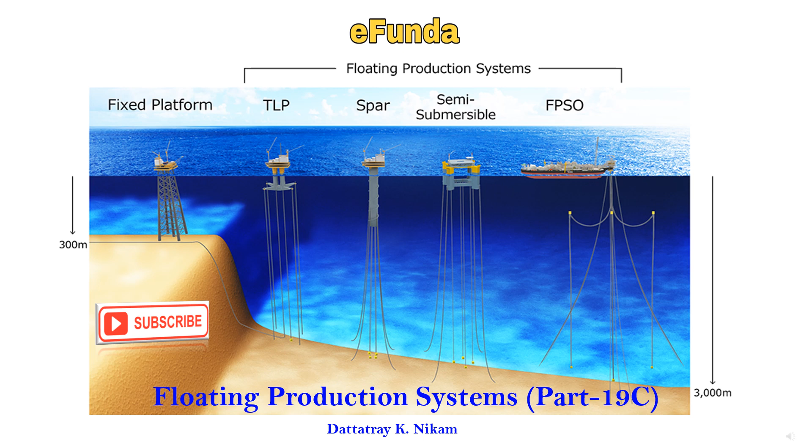So let's begin with our today's topic, that is Floating Production Systems Part-19C. Floating Production Systems. For these topics we have collected some of the pictures from the internet and some of the company websites. Thanks to those organizations for having such great pictures where one can describe the details of the various floating production systems.

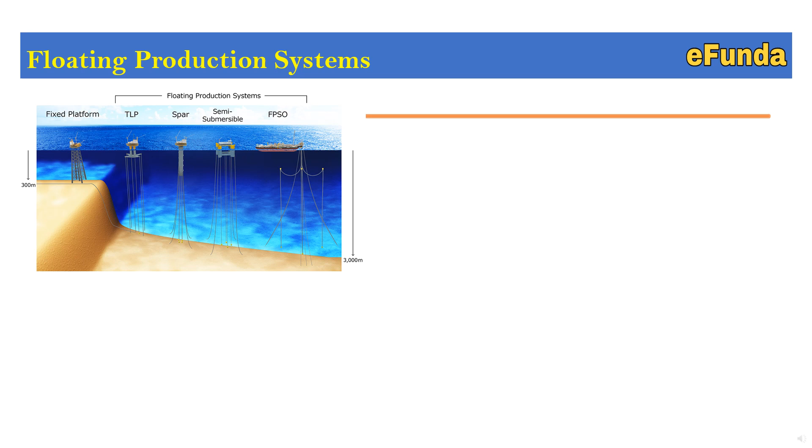One can refer to the picture where the floating production systems are shown, where the types are covered: fixed platform, TLP, SPAR, semi-submersible, FPSO. Production systems used for offshore oil and gas production are classified as fixed platform and floating platform based on the type of the platform.

A fixed platform is a platform that is fixed on the seabed. On a fixed type platform, including the production system itself, it is necessary to construct infrastructure such as submarine pipeline, onshore storage tank and port loading facilities.

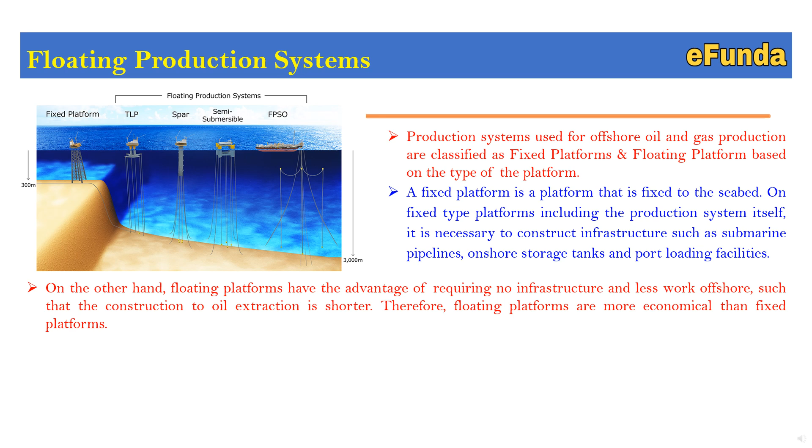On the other hand, floating platforms have advantages of requiring no infrastructure and less work offshore, such that the time from construction to oil extraction is shorter. Therefore, floating platforms are more economical than fixed platforms, as the structure and offshore work is minimum.

By applying advanced mooring technology, floating platforms can operate in water too deep for fixed platforms to be installed. In recent years, the development of offshore oil and gas fields has expanded to deep water and ultra deep water areas, and the number of operating floating offshore oil and gas production systems and the demand for such systems has grown, which led to the development of various FPSOs, FSOs, TLPs and production semi-submersibles, etc.

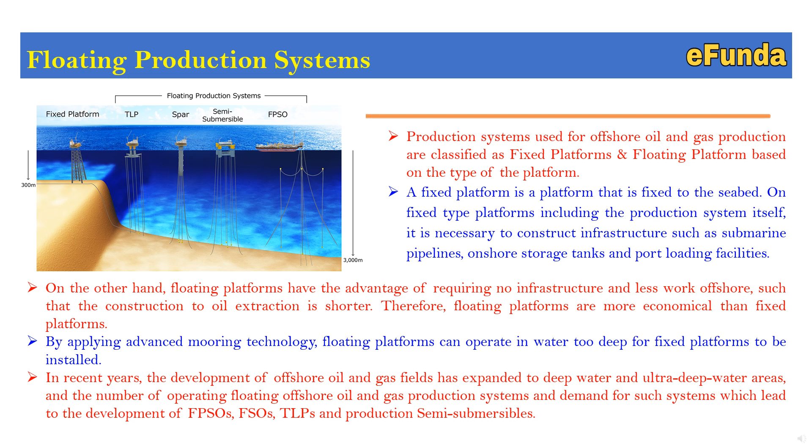This is how we have tried to cover the types of the floating platforms and systems, and the details we will see in the next slide. As we progress in this video, it will be very interesting, as we are trying to cover the floating production system, their details and types, along with typical block diagrams, sketches and platform details. So keep watching this video till the end.

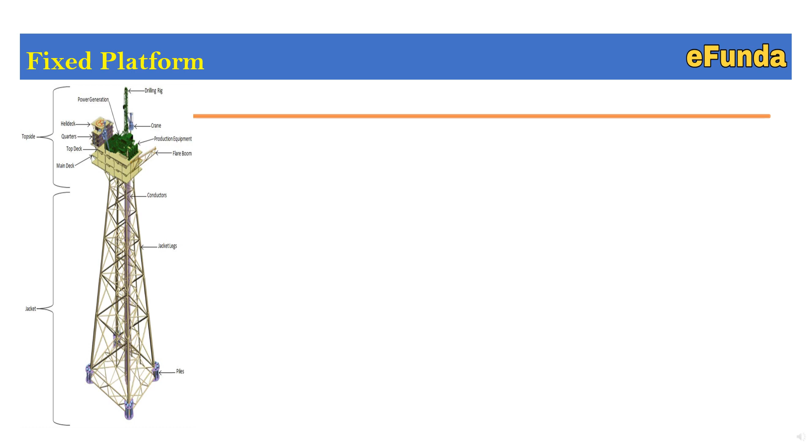Fixed type platform. One can refer to the pictures where one typical structure is shown, with the details of the various components being installed. Similarly, one can refer to the other picture where various types of typical towers are shown. Similarly, the third picture where you can see the details of a few more towers, which we will see in detail.

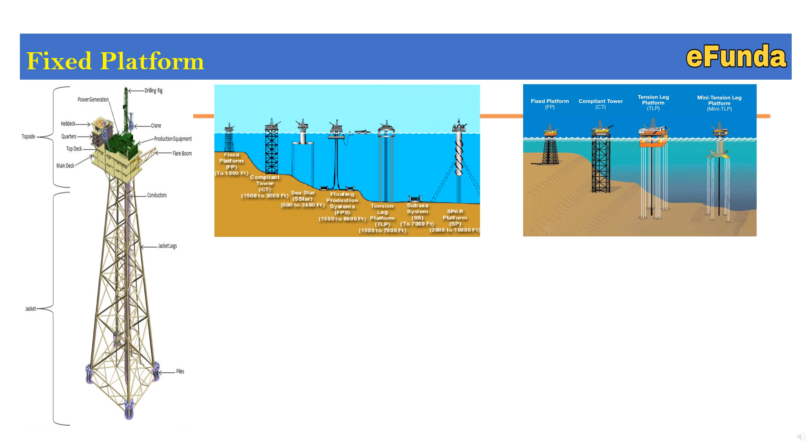A fixed platform is a type of offshore platform used for the extraction of petroleum or gas. These platforms are built on concrete and/or steel legs anchored directly onto the seabed, supporting a deck with space for drilling rigs, production facilities and crew quarters.

One can refer to the picture on the left hand side. One can see the jackets where the piling is done. Jacket legs are shown. Inside, the conductors are there. On top of that, one typical topside is installed. The various components of the topsides are the flare boom, main deck, top deck, living quarter, helideck, production or power generation, drilling rig, crane, production equipment, etc.

Conventional fixed platforms used for the production of oil and natural gas are constructed on top of steel jackets that are anchored with steel piles secured into the seabed. These platforms are strong and hold up well against environmental forces, but they are too costly for depths of over 1,500 feet.

One can refer to the second picture where each structural type along with the water depth is shown. Fixed platform FP to 1500 feet, compliant tower CT 1500 to 3000 feet, Sea Star 500 to 3500 feet, floating production system FPS 1500 to 6000 feet, tension leg platform TLP 1500 to 7000 feet, subsea system SS to 7000 feet, SPAR platform SP 2000 to 10,000 feet. This is how the types are covered.

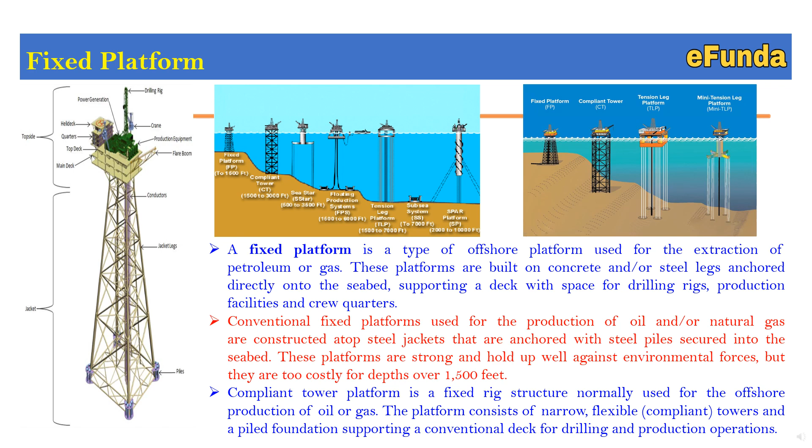A compliant tower platform is a fixed rig structure normally used for the offshore production of oil or gas. The platform consists of a narrow, flexible compliant tower and pile foundation supporting a conventional deck for drilling and production operations. One can refer to the third picture where the details of the fixed platform, compliant tower, tension leg platform and mini tension leg platforms are shown. This is how the fixed structures are installed at the seabed level, supporting the structure.

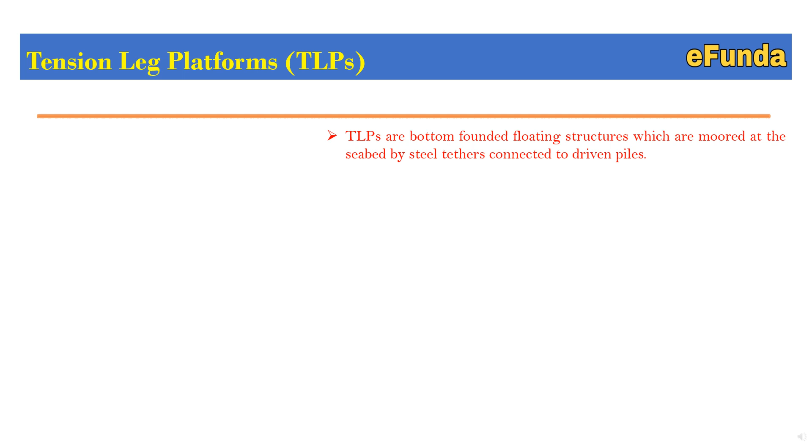Tension leg platform, that is TLPs. TLPs are a bottom founded floating structure which are moored at the seabed by steel tethers connected to driven piles. A tension leg platform is a vertically moored floating structure.

One can refer to the picture where one can see the connection to the seabed along with the hull and the topside, where mainly the starting of the oil export line, gas export line, production facilities, accommodation, helipad, drilling rig, topside facility, hull and tendons are connected.

The platform is permanently moored by means of the tethers or tendons grouped at each of the structural corners. A group of tethers is called a tension leg. A feature of this design of the tethers is that they have relatively high axial stiffness, that is low elasticity, such that virtually all vertical motion of the platform is eliminated,

and this allows the platform to have the production wellhead on the deck connected directly to the subsea well by a rigid riser instead of on the seafloor. This allows a simpler well completion and gives better control over the production from an oil or gas reservoir and easier access for downhole intervention operations. This is how the tension leg platforms are built.

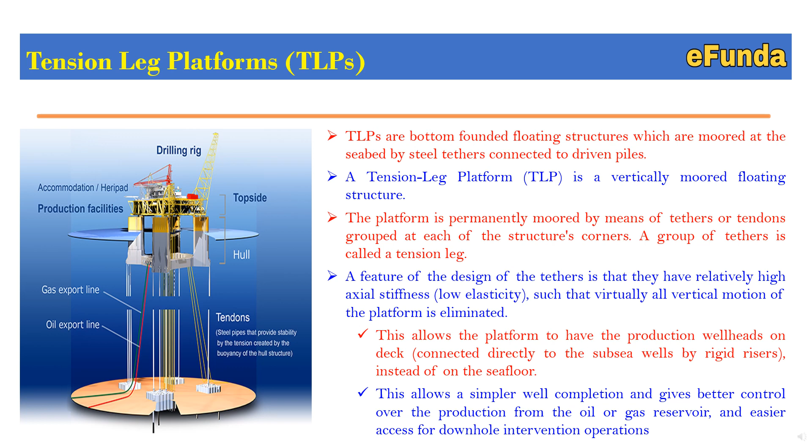Moving on to single point for activities and recreation, SPAR. A SPAR is a type of floating oil platform typically used in very deep water and is named for logs used as buoys in shipping that are moored in place vertically. SPAR production platforms have been developed as an alternative to conventional platforms.

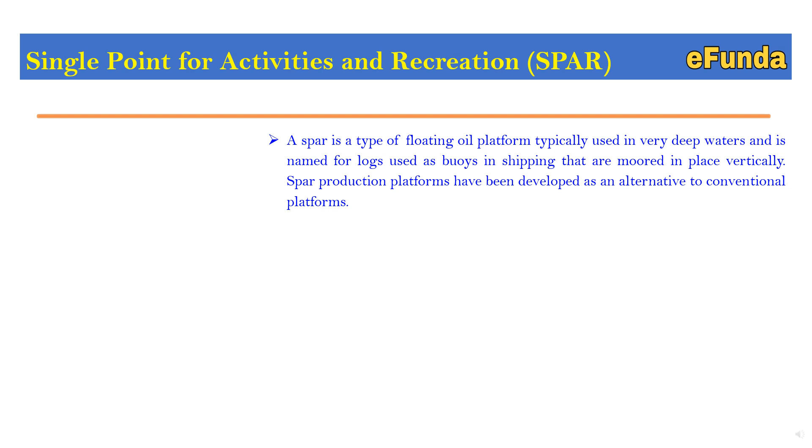One can refer to the picture where the components involved are truss spar, freeboard, hard tank, midsection, soft tank and keel. Spars are moored to the seabed, but whereas a TLP has vertical tension tethers, a spar has more conventional mooring lines.

Spars have to date had three configurations: the conventional one piece cylindrical hull, the truss spar where the midsection is composed of truss elements connected to the upper buoyant hull with the bottom soft tank, and the cell spar, which is built from multiple vertical cylinders.

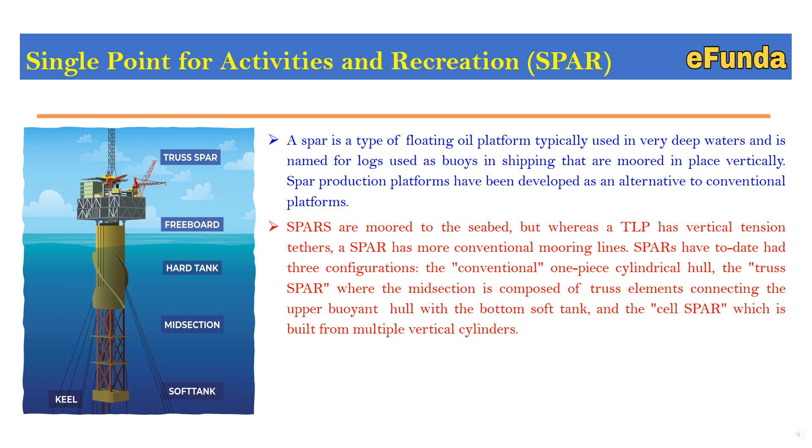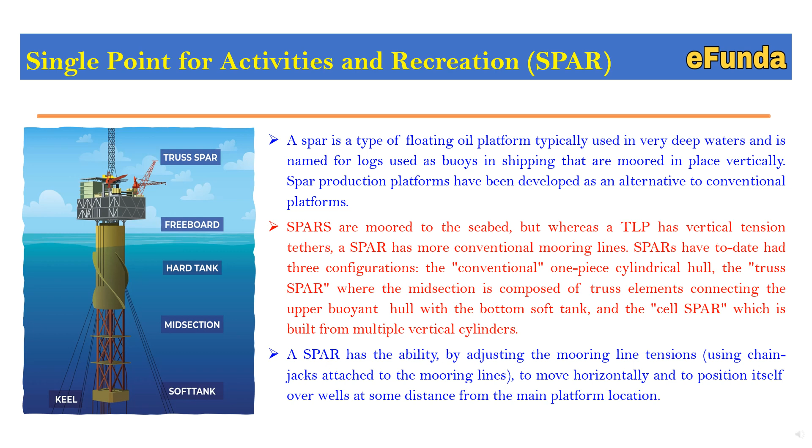A spar has the ability, by adjusting the mooring line tension using chain jacks attached to the mooring lines, to move horizontally and position itself over wells at some distance from the main platform location. This is how typically the activities and recreation are carried out at the platform called the SPAR. One can see the picture and correlate the details.

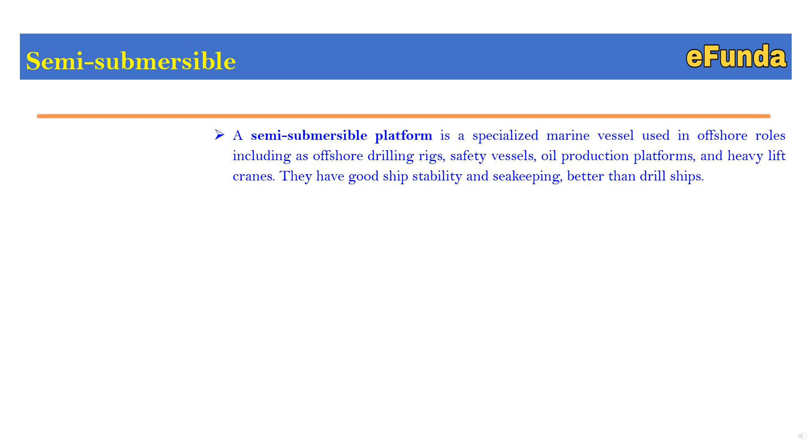Semi-submersible. A semi-submersible platform is a specialized marine vessel used in offshore roles, including as offshore drilling rigs, safety vessels, oil production platforms, and heavy lift cranes. They have good ship stability and sea keeping, better than the drill ship.

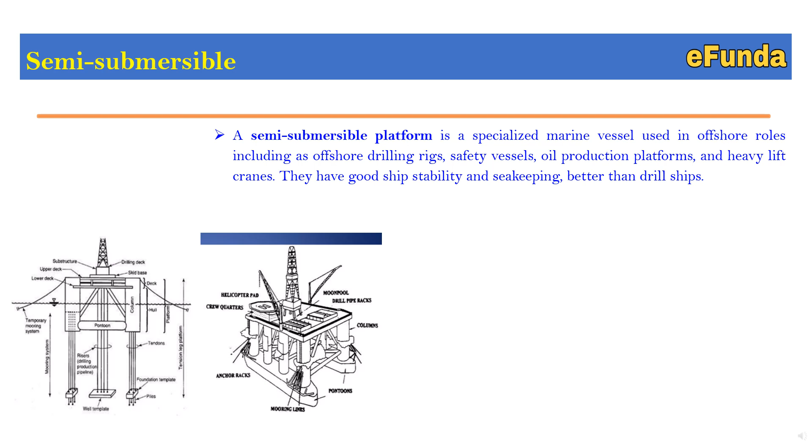One can refer to the picture where one can see the semi-submersible structure where mooring lines, pontoons, columns, drill pipe rack, moonpool, helipad, crew quarters, anchor racks are shown. Simultaneously, in the other figure one can see where top decks, columns and pontoons are shown. We will see the details of the components and their functionality.

Topside: the deck, which has all the production equipment used to treat the incoming well stream, and pumps and compressors needed to transfer oil and gas to next destinations. Normally topsides include living accommodations for the crew. In most cases, the export lines are connected to the deck.

Columns control waterplane area and draft height to ensure the semi-submersible is less affected by wave loading, to maintain stability. Pontoons provide buoyancy for the semi-submersible by their ballasted watertight structure located below the ocean surface.

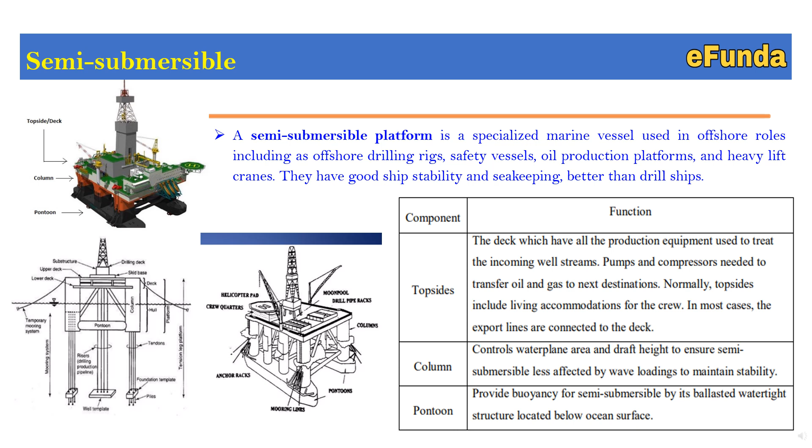This is the structure of the semi-submersible, and one can see the other figure as well, where the well templates are connected to the pontoons and pontoons to the structure, where the drilling deck, skid base, upper deck, lower deck, columns etc. are shown.

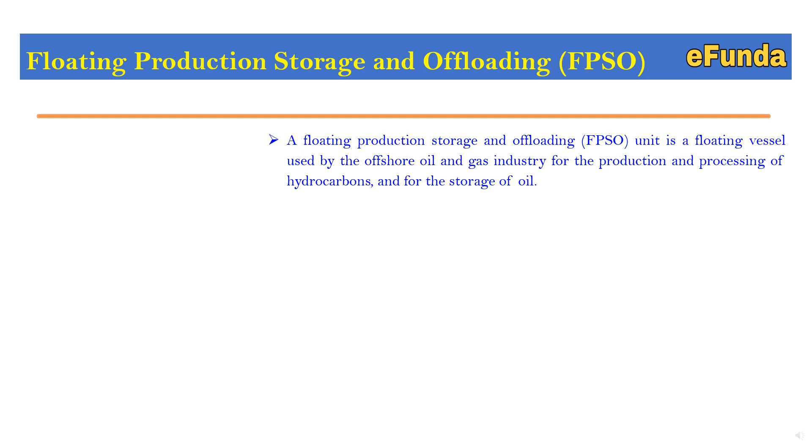Floating production storage and offloading, that is FPSO. A floating production storage and offloading, FPSO, unit is a floating vessel used by the offshore oil and gas industry for the production and processing of hydrocarbons and for the storage of oil. One can refer to the picture, image courtesy of MODEC.

A FPSO vessel is designed to receive hydrocarbons produced by itself or from a nearby platform or subsea template, process them and store oil until it can be offloaded onto a tanker or, less frequently, transported through a pipeline.

One can refer to the second image where the Van Gogh field schematic is shown, thanks to image courtesy of Van Gogh FPSO, where the FPSO is connected to the flow lines and to the subsea manifold wellhead area by umbilical lines, and flow lines are connected to the further subsea manifold and wellhead.

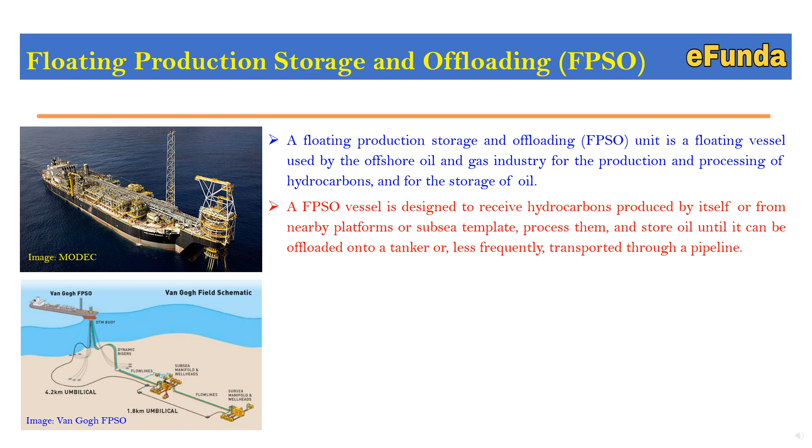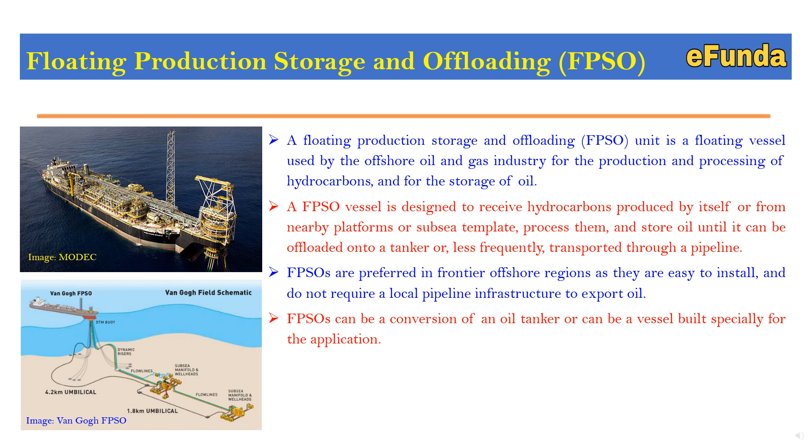FPSOs are preferred in frontier offshore regions as they are easy to install and do not require a local pipeline infrastructure to export oil. FPSOs can be a conversion of an oil tanker or can be a vessel built especially for the application of floating production storage and offloading of hydrocarbons.

Floating storage and offloading, that is FSO. A FSO is a vessel used only to store, that is without processing it.

It is referred to as a floating storage and offloading, that is FSO vessel. One can refer to the picture, image courtesy by MODEC.

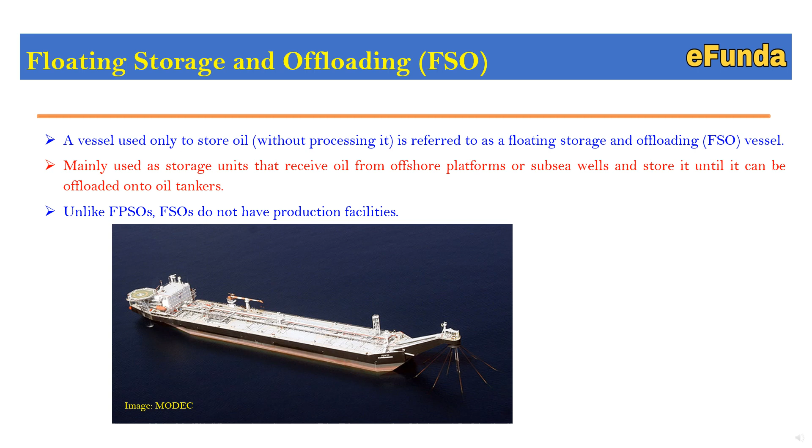Mainly used as a storage unit that receives oil from an offshore platform or subsea well and stores it until it can be offloaded onto an oil tanker. One can see the structure connected to the export lines, where it's connected to the seabed, and the transportation lines are connected and transferred to the storage. Similarly, this facility has a helideck and some storage facility.

Floating storage unit, that is FSU. Floating storage units take the form of a large barge, in contrast to the supertankers associated with FPSOs.

Simply put, these units are used to store oil and gas in large silos placed on top of the vessel. One can refer to the image, courtesy of LNGC ISH, where one can see it's like an FPSO or FSO, used for storage of crude oil, where large silos are placed on the ship as a carrier and have a relatively small storage capacity compared to FSO.

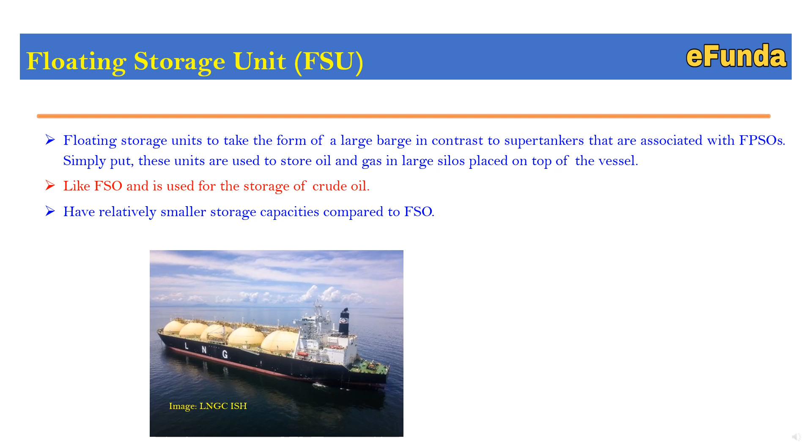It may not have a dedicated offloading system. Instead, it may rely on a ship to ship transfer method. That is why it is called a floating storage unit, as it only has storage capacity.

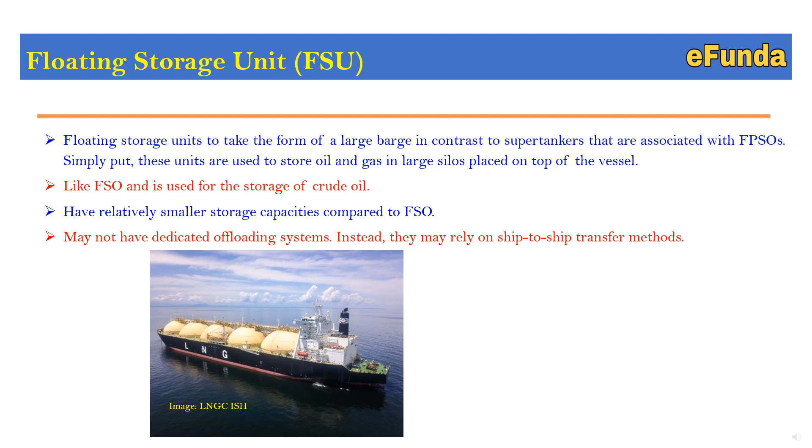Floating liquefied natural gas, that is FLNG. A floating liquefied natural gas FLNG facility is a floating production, storage and offloading unit that conducts liquefied natural gas, that is LNG, operations for developing offshore natural gas resources.

Floating above an offshore natural gas field, the FLNG facility produces, liquefies, stores and transfers LNG and potentially LPG and condensate at sea before it is carried by ship directly to the market.

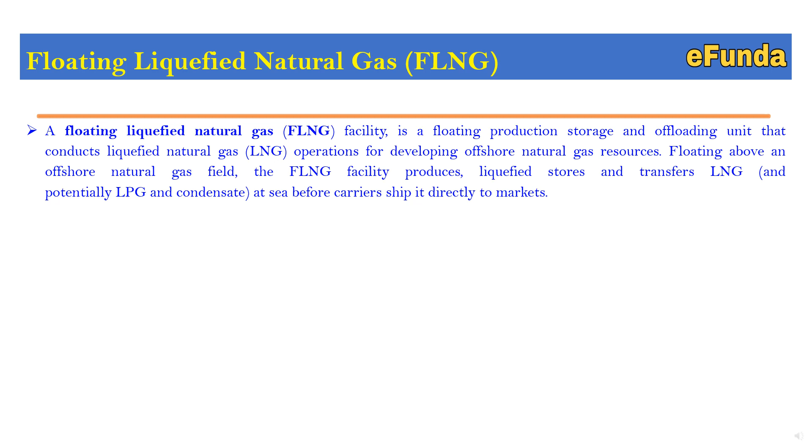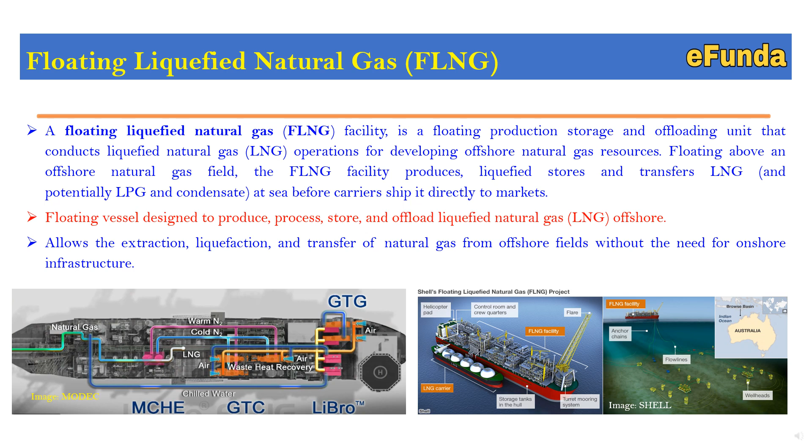In another figure, one can see the wellheads connected through flow lines and anchor chains connected to the FLNG facility. It is a floating vessel designed to produce, process, store and offload liquefied natural gas, LNG, offshore. This allows the extraction, liquefaction and transfer of natural gas from an offshore field without the need for onshore infrastructure. This is how FLNG is being built.

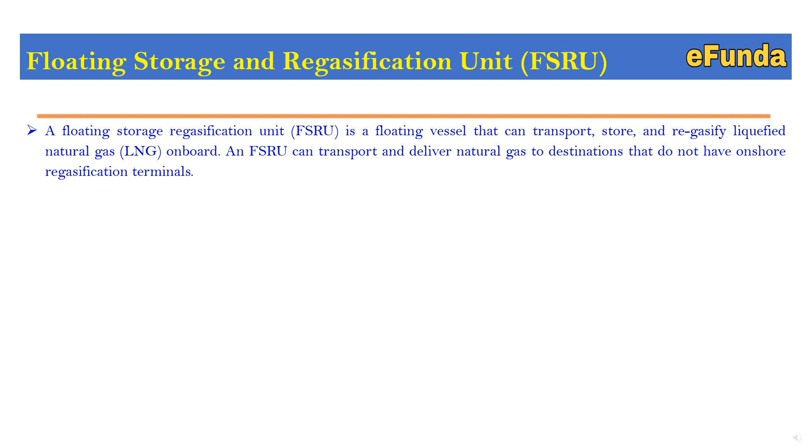Floating storage and regasification unit, that is FSRU. An FSRU is a floating vessel that can transport, store and regasify liquefied natural gas, LNG, on board, and it can transport and deliver natural gas to destinations that do not have an onshore regasification terminal.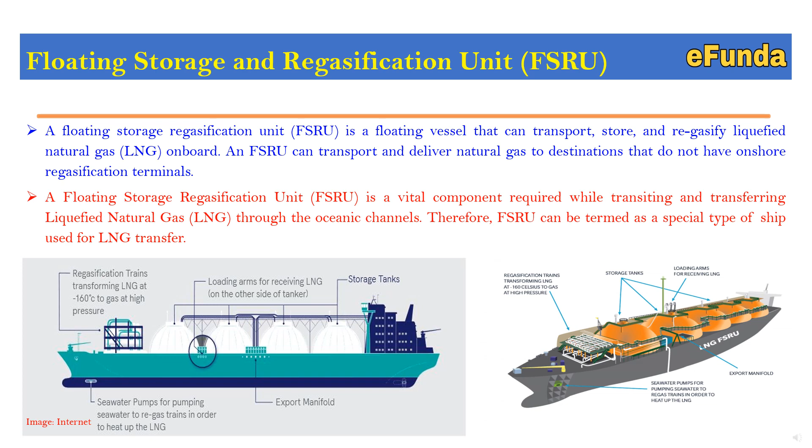A floating storage regasification unit is a vital component required while transferring liquefied natural gas LNG through oceanic channels. Therefore, FSRU can be termed as a special type of ship used for LNG transfer.